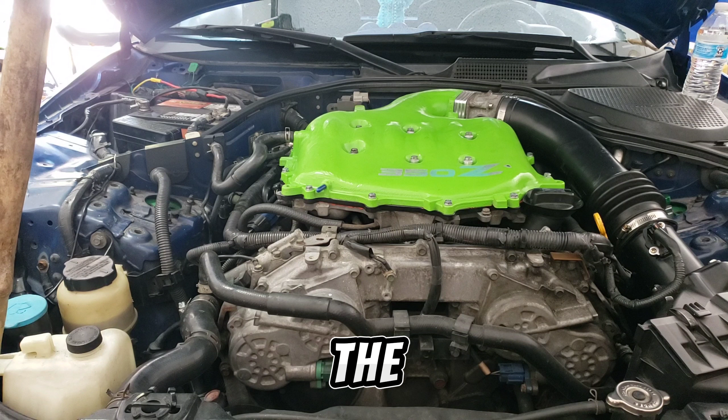You've seen the title, and that's what I'm going after. The principle behind it is the fact that the bottom of the actual fuel injector only has an O-ring separating a large gap of air between. So there could be a potential large leak right there at the bottom of the fuel injector, while the top fuel injector O-ring is still intact, because that is the side that actually holds the fuel to the fuel rail.

So what I'm thinking is the bottom O-rings on the fuel injectors have went kablooey. So hopefully that's it. I think I showed you before in another video. I got a set of the O-rings here, a whopping $7 from the auto parts store. Luckily these O-rings come with a 2-year warranty or something like that.

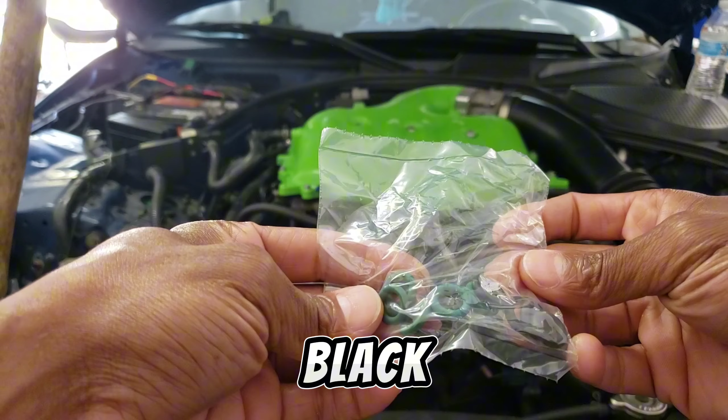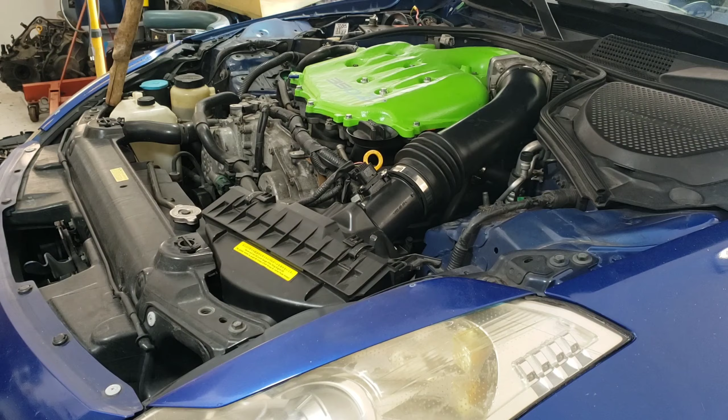Okay, here we are with green and black O-rings. So I'm hoping that one of these has gone kaput, and that's what my problem is. So hopefully after this rebuild, it'll actually stop doing this P2A00 code, and that'll be it. But won't know until we get there.

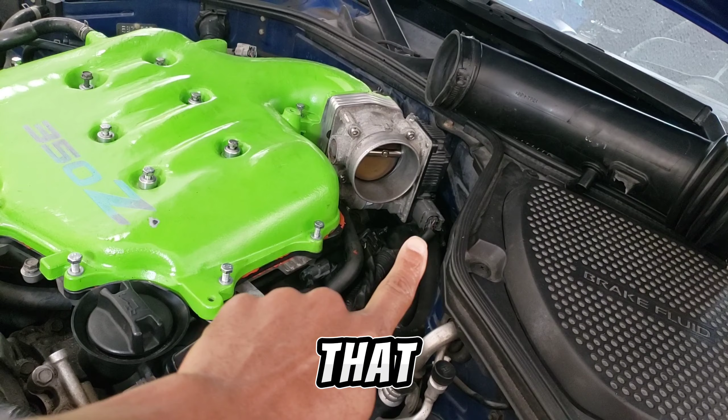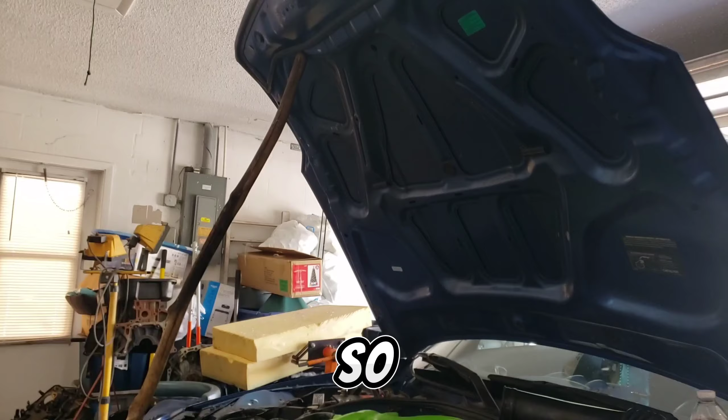Just want to show you that I am going to disconnect that throttle position while the battery, if you can see that down in there, is still connected, and I am going to go ahead and disconnect that and not have any worries about whether it's relearned or not. So I just wanted to stop and show you guys.

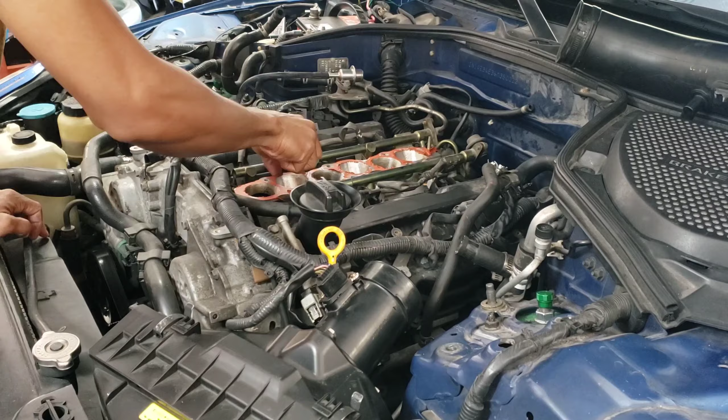So I'm pulling up on that right there, just giving a light prying motion. And if you look at the base of the actual, well, I'm prying up here, okay, just light backwards, nothing to take anything out yet. Okay, so it's got some play, which is expected, because it's an O-ring and rubber moves because it's not concrete.

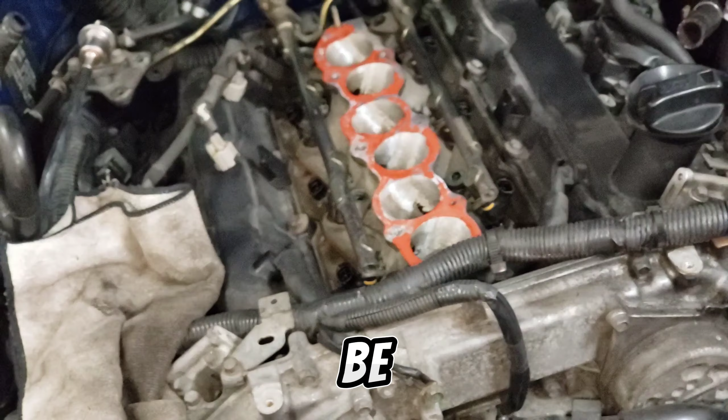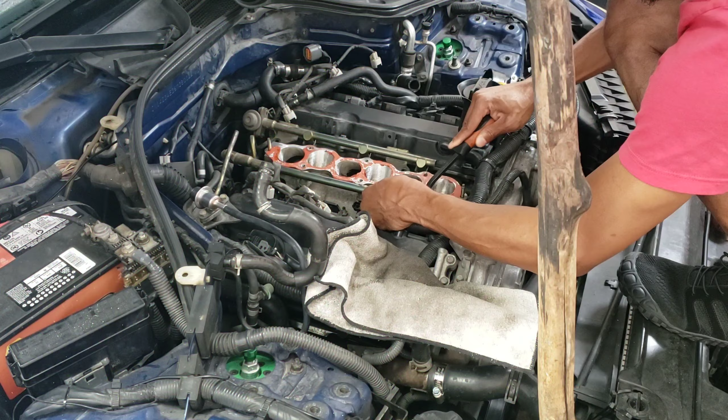But what I did notice, this is still technically bank one, this back one was moving a hell of a lot more up and down compared to the other ones when I'm just lightly prying up before I actually try to unseat that, because you can kind of see how that one's moving right now a little bit. But this back one here, oh man, that was moving a lot. So that might be a good indicator. Regardless, I'm still going after it because I got these O-rings sitting here, so let's keep going at it.

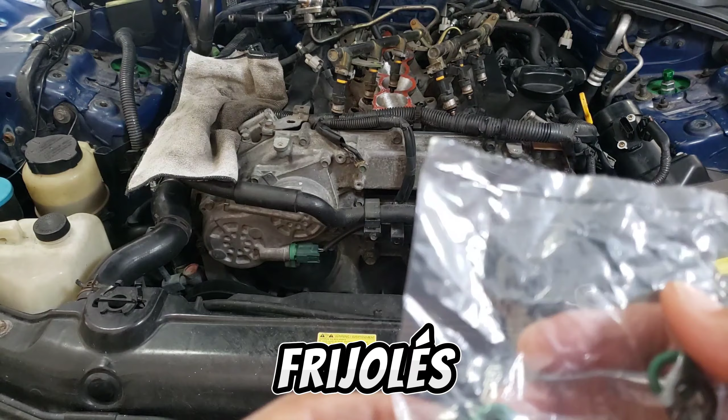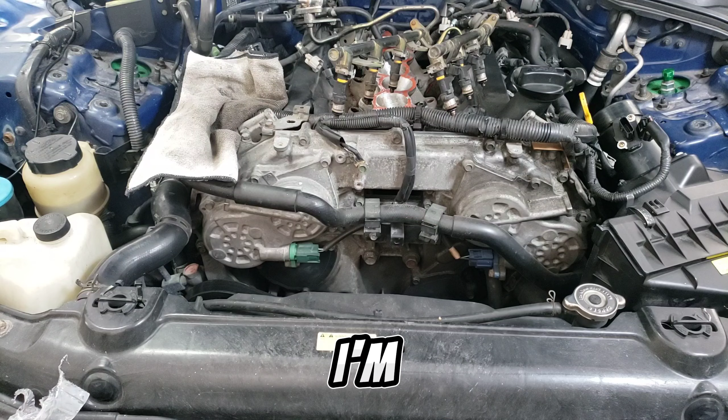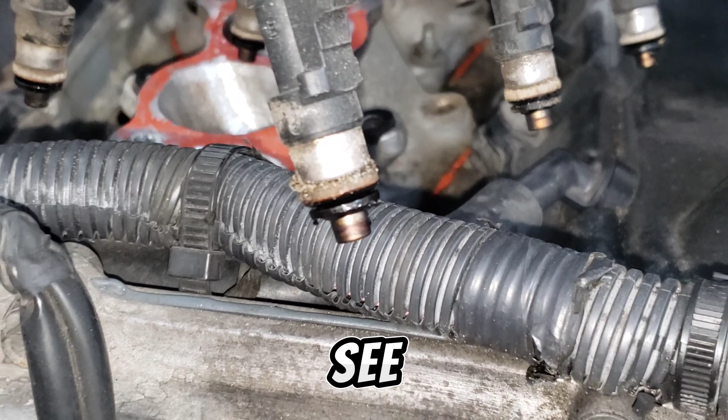Holy frijoles. So for example's sake, these are brand new O-rings. Okay, so example. Serious right now? Get out of the bag. Okay. Alright, so you have one green and one black. That's what these look like new, okay? What I'm about to show you is the ones that are on my car that has 200,000 on it. Let's turn the light on and shine some light on this, and you see what I see.

Cruddy, very cruddy. Look at that one. What is that? That's supposed to be the O-ring. What is that? I might have to turn the white balance down just to show you, because it's so freaking ashy and nasty looking that there's a possibility that could be the whole freaking issue. But never know, because it's a wonderful time here, replacing all kinds of shit for one code.

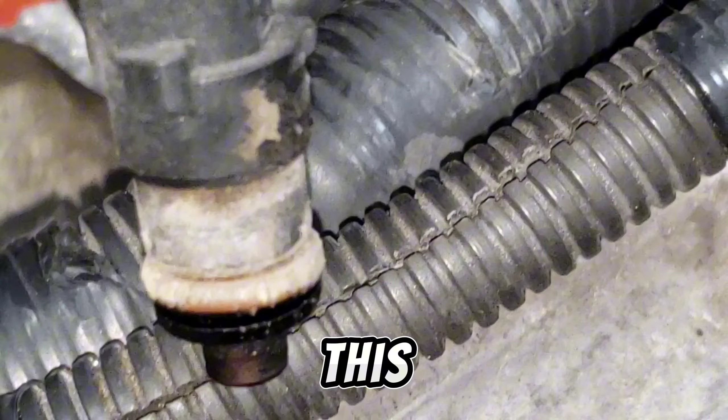Here we go. That is a clear picture of that. That is horrible. Next up, would you look at that? Just take a look at that. And where's this last one at? Yeah. So you get it. These are horrible. This honestly could be the issue.

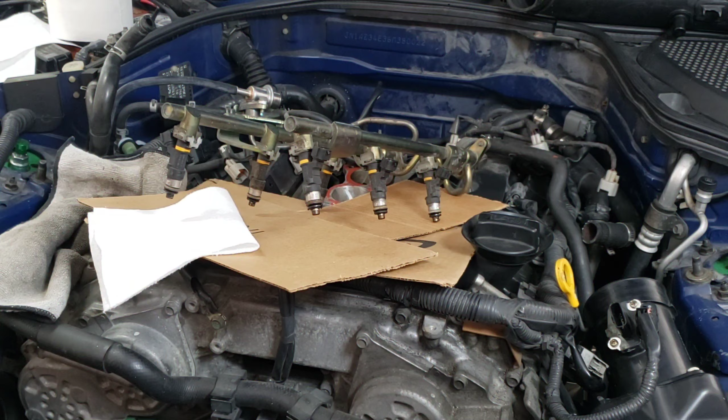When I started taking everything apart, the bolts were pretty much telling me that nobody was in there ever before. So I'm gonna start picking those apart and replacing both top and bottom sides. I don't necessarily have to do the top side because the top side is towards the fuel and I don't technically have a fuel leak, but looking at the age of the bottom ones, I really don't want to set fire to the project here, because that's a big old nope.

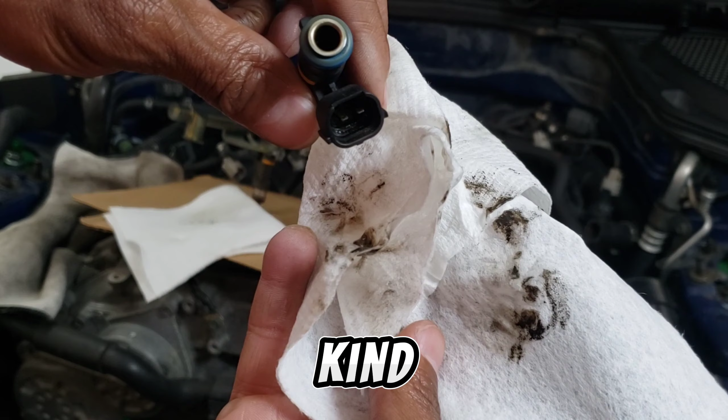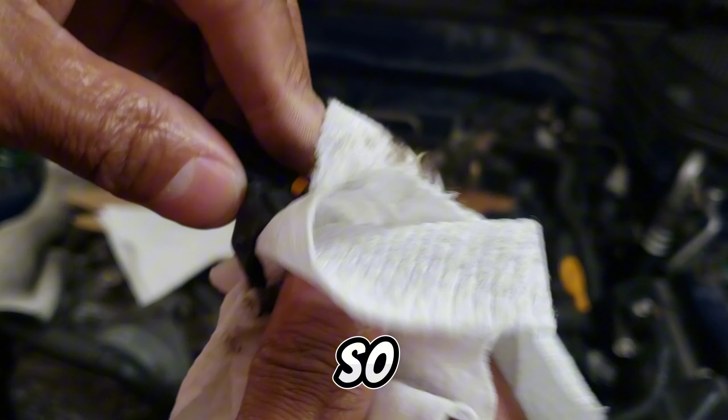This is all the crud that's coming off of this though. I don't see anything down the barrel. The barrel looks clear. It just looks really rotten down below on the O-ring. And the top one don't look too good either, but I mean it looked better than the bottom one did. So moving on.

So I just wanted to cover that to make sure that it didn't spew out anywhere. I'm not exactly wearing safety goggles right now. Regardless, I used a little bit of the gas that came out of it to help clean it. I'm gonna put these on the bench after and actually go through a small bottle of the cleaner just to help everything out. But yeah, rinse and repeat, and I'm gonna get going on these other ones, and I'll let you get a look at the comparison on O-rings.

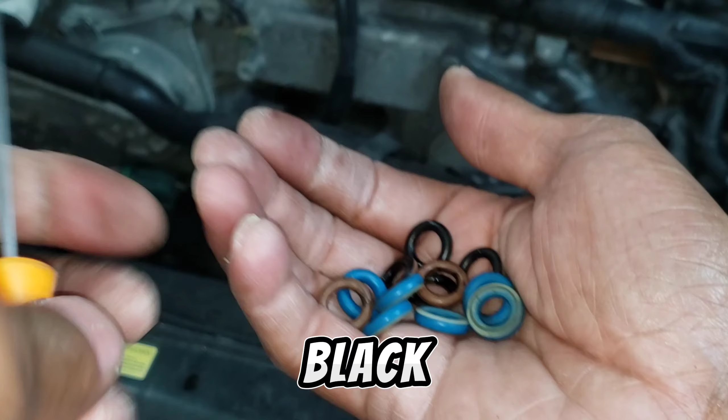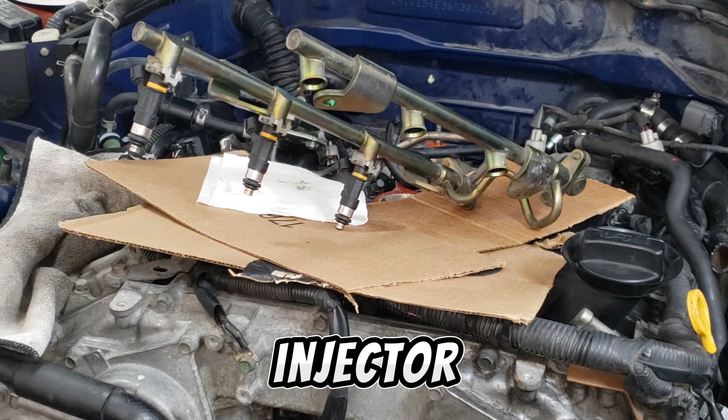Alright, so these are the O-rings that are all off of the old injectors. I guess these are the factory OEM ones. I'm not sure, but they still have some flexibility, but they were definitely way harder and a different size than the ones I just put on there. I did put black on bottom, but just with the simple Harbor Freight hook, I was able to take these off of here. The ones around the bottom are a little bit harder to take off, just FYI.

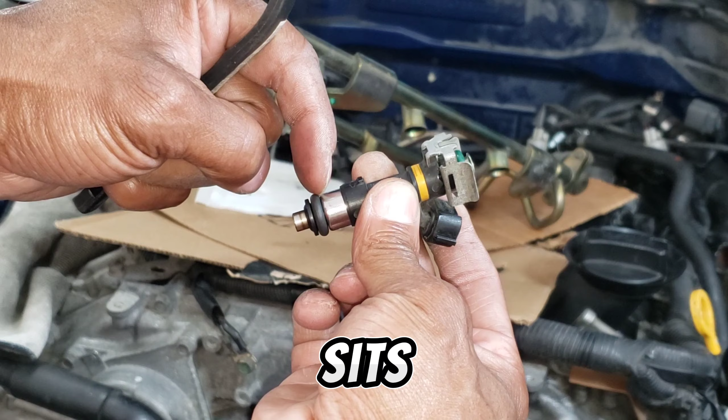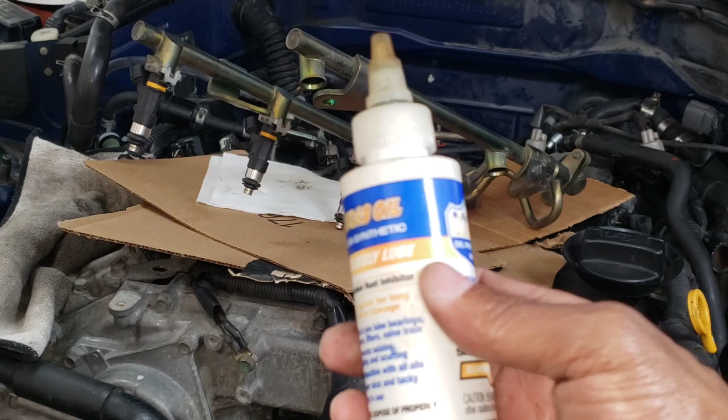And also, just FYI, if you do the injector O-rings, clean this area in between here. I brushed it with one of these kind of toothbrushes here, and I pretty much cleaned in between there where the O-ring sits, and then I wiped it off with a towel, which gives me this nice kind of finish that you see right now. Then I put just a little bit of engine assembly lube, the Lucas Oil engine assembly lube. There we go, semi-synthetic.

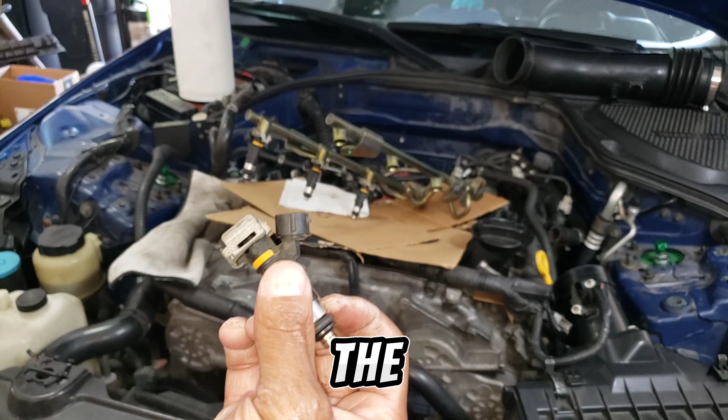This right here is great for O-rings and other things without deteriorating anything. So I put just a little bit on there, which is why that O-ring looks glossy. I didn't do it on the bottom side yet because I still want to clean the manifold. Make sure that nothing slides in that way when I put this back together. But just a tip, when you're putting these back together, get your O-rings back on there and then put your clip in first. So let me set you up here.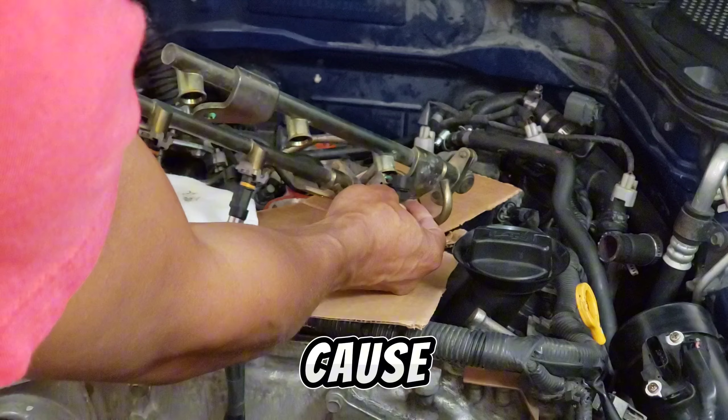This is so simple. Once you have this all set up and put together, it's just as simple as, because the injector connector goes towards the outside, all I'm doing is just a little nice pressing together, and it just clicked in there. Give it a little twist, a little bounce around just to make sure everything seats, and there it is. I can really feel it seat now. It doesn't want to twist or anything. Just that easy. Put that clip on there first and then just smush that upward nicely.

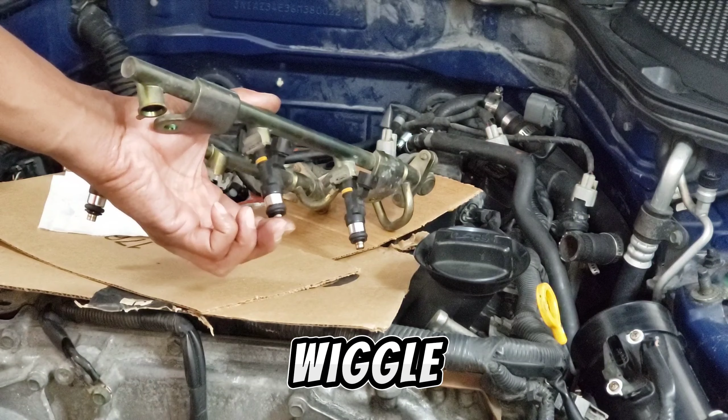Keep in mind that you're dealing with a piece of rubber that's keeping all your fuel in, okay? So be really nice about it when you put this in here. But regardless, a little snap twist, a little wiggle, nothing too crazy, not trying to break the plastic fuel injector. Easy as pie. Nice and easy. Everything's just clipping in just right. All right, and there you have it.

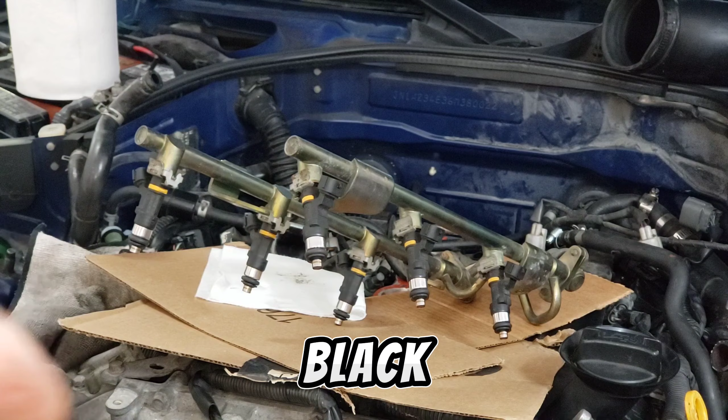So I'm gonna clean the bottom of the manifold where all the black O-rings on the bottom of the injectors go. I'm gonna clean those orifices, and then I'm gonna go ahead and put this all back together. And it's highly plausible that it's the O-ring, being 200,000 plus miles. It's not the average thing that goes bad.

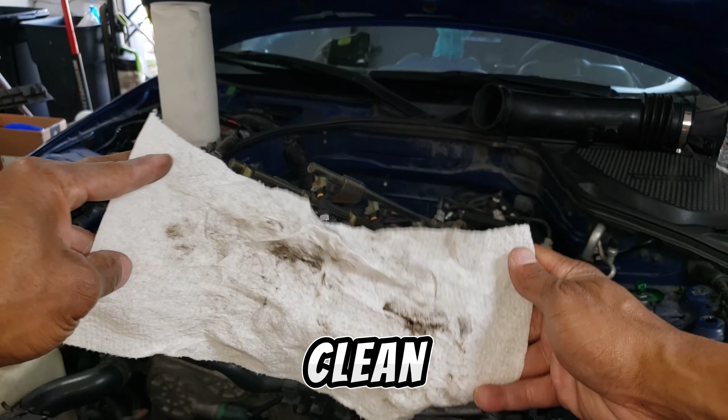This is the towel that I used to clean the injectors. That ain't clean, so yeah, definitely. And this isn't even the only one. I used 6 other ones just to clean and get those out of there. So there's a lot of crud in there.

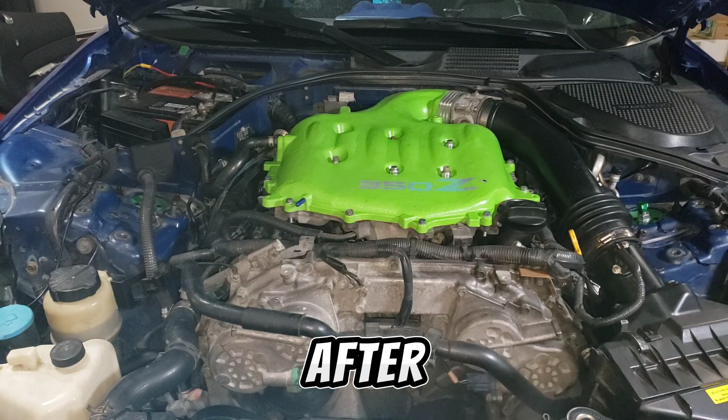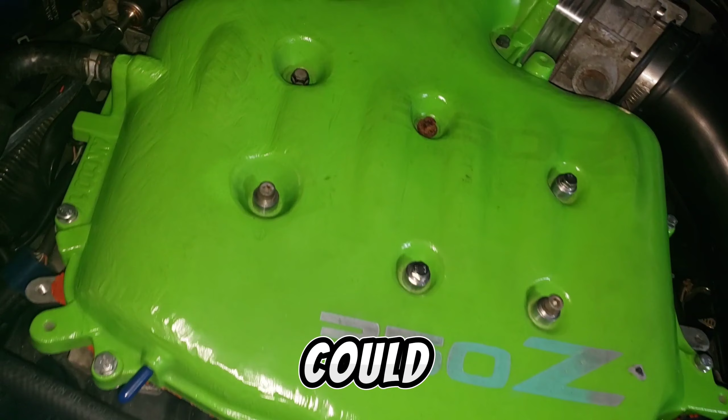So there's a good chance that this actually might solve that lovely P2A00 code. So hopefully this is it. So I should have been rolling for rebuilding this, because when I was rebuilding this, I heard two of the most devastating noises I could hear right now, which was these two bolts I over-torqued, which made like a good old ping kind of noise, and it was not good.

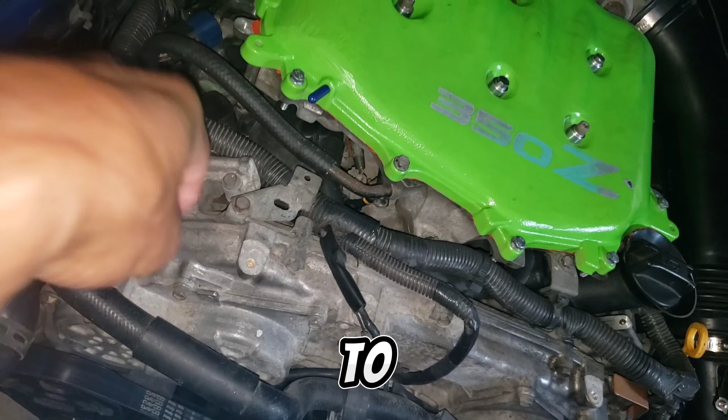So I took it all apart again, re-tapped the threads on that and that one and that one there. Those two that I was showing you, and I tried to get longer bolts. It didn't really help. It was the threads inside the lower one here that's waiting for the nice guy to come down and screw into it. So I re-tapped that, got some different bolts. It's working out for now.

When I threw it back together, I heard a vacuum noise, and it's not this vacuum. It was actually a true vacuum noise coming from there. The actual spacer, I don't know if it warped or if it was just originally not plotted right when it was made. It was leaking right in this area here. That was leaking right there. Unfortunately, I had to delete my intake spacer.

So after I took that apart and deleted that and got rid of that vacuum noise and did those two bolts, got those to fit in together, and put it all back together, after a short while, the code did come back again. So fuel injectors, they were an issue, don't get me wrong, and I'm going to show you in a second on the graph what the difference is, because while driving it did seem so much better. It really was a lot better.

In fact, third gear chirped like it used to before this problem started. With the recent fix with all the injector O-rings, it actually did chirp this time. So before the code was set, it was giving me quite a bit of power that I was happy to have, even without the spacer in there. I still have the throttle body spacer up there. Oh, there we go. I still have that spacer there, but the intake one is deleted.

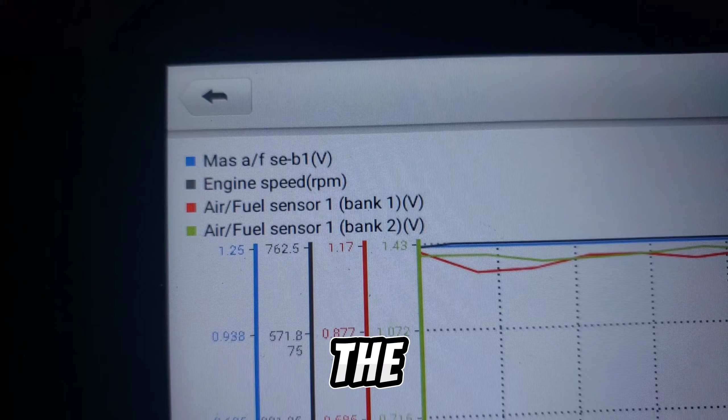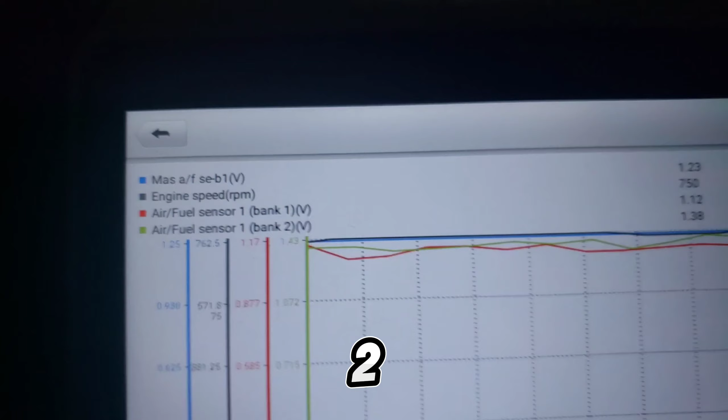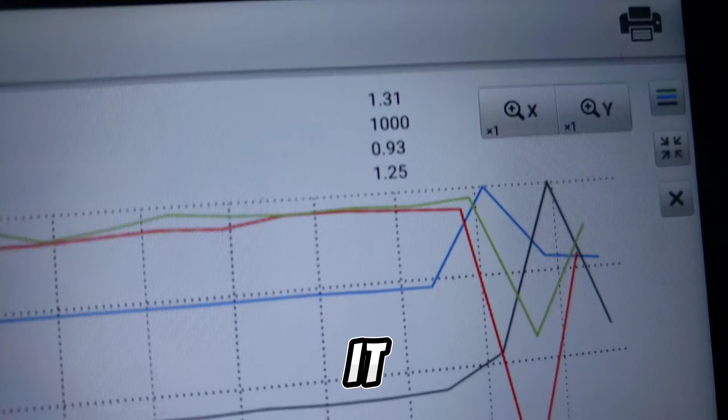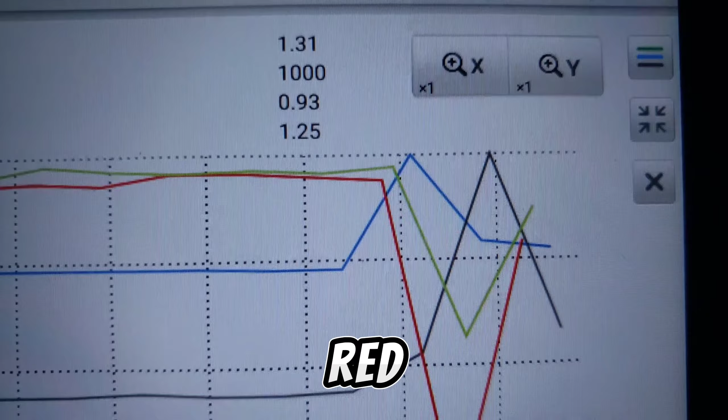So after the repair, on the graph, the mass airflow is represented by blue. Engine speed is a weird gray. Well, we'll go with that. Bank 1 is red, and light green is bank 2. As soon as I got this thing started, it registered everything as really rich. So what happened after I did the fuel injector O-rings? Well, as you see on the first blip here, it didn't raise very much. There is barely an upward motion with the light green and the red, so that'd be the air fuel O2 sensors.

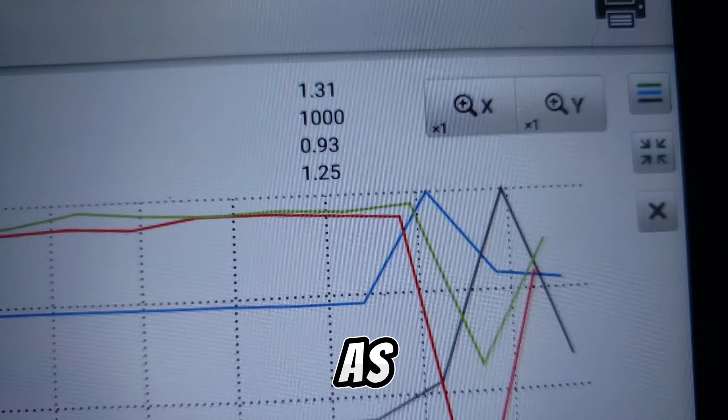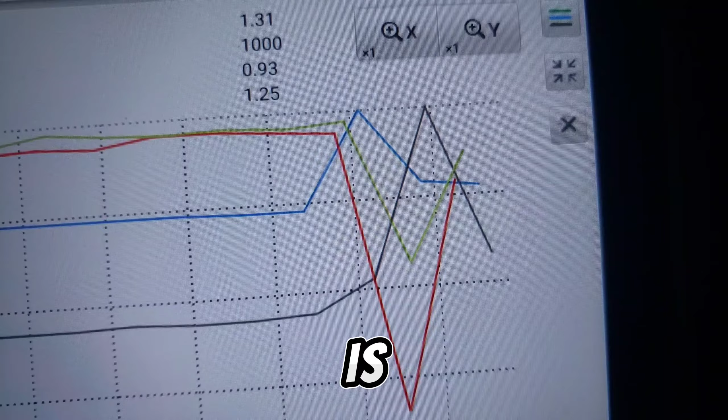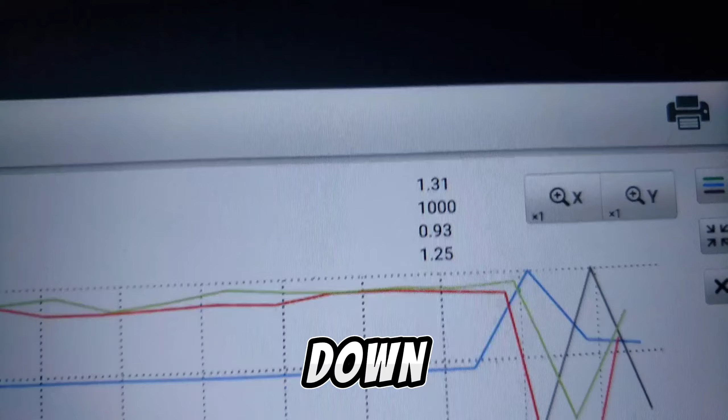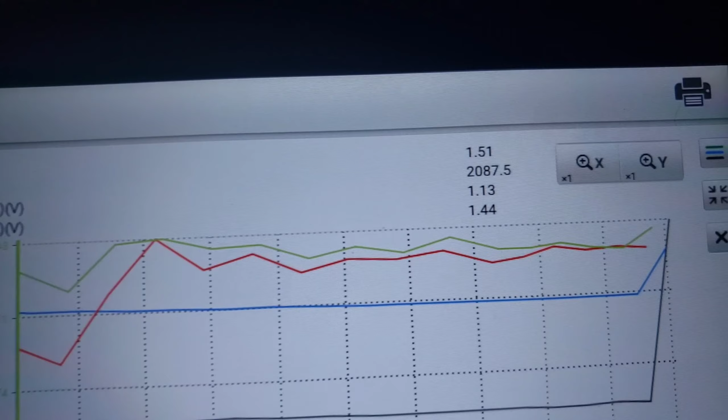There's a lot of air coming through on the light blue, and as that blue is coming up, the O2 sensors are just barely going up and then spiking down as the engine RPM is raising up. So that area right there is doing a lot better instead of spiking up and then coming down. And we'll get to the next one so you can see 1.13, 1.44 going up to 2000 RPM. We have 1.5 volts on the mass airflow, nice little blip.

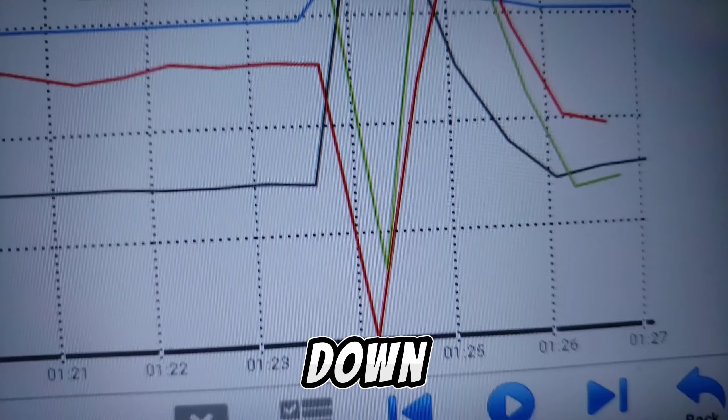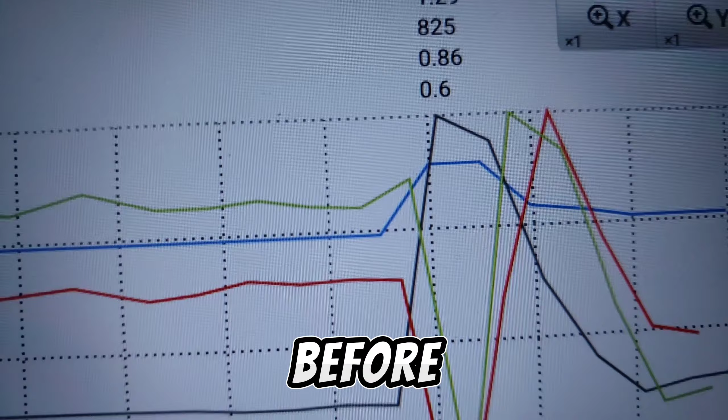But you see there's just a small blip there, which I think might still be the issue, because like I said, the code came back after driving, for fuck's sake. And it's doing its usual, trying to figure everything out. Looking at that, the red went way down. It didn't even come up. It went way down, and then did its usual thing. The green, however, did spike up just a little bit before it registered the mass airflow sensor voltage, so maybe that's an issue, maybe not, don't know. It's a decent amount though.

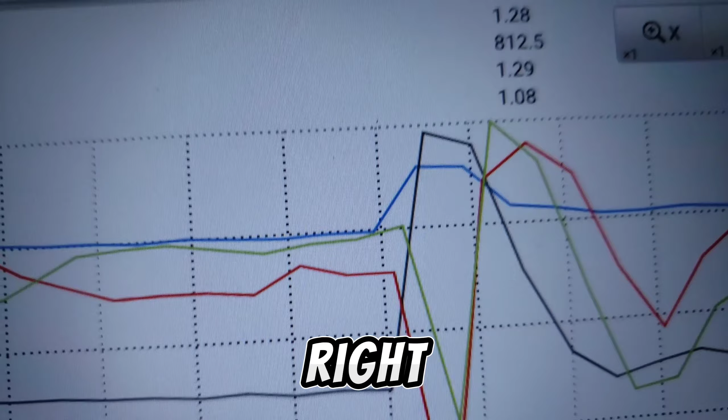Less of a blip. These are definitely less of a blip coming in right there, right there, for the green and the red. Of course, I'm going to still stay on this and everything, but I wanted to give you guys a look at the graph right after the repair on the same video.

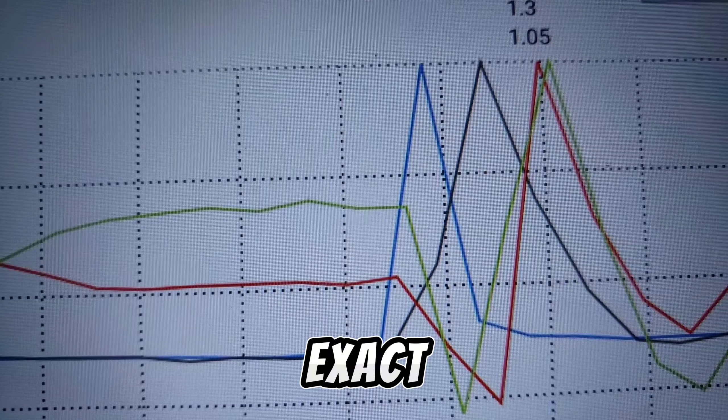So as you can see, this is looking a lot better, a lot more clean as to what we were looking for before, I do believe, because here we are, a nice strong blip of air, and the red line almost barely comes up, and then it shoots down, which is fine, you know. Again, all these cylinders don't fire at the same exact time, so I think that's okay.

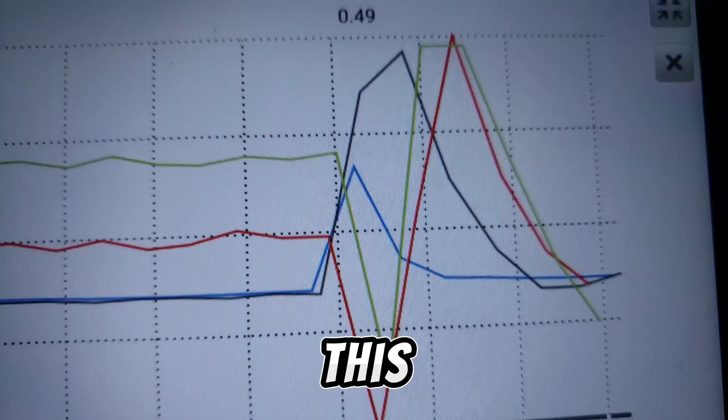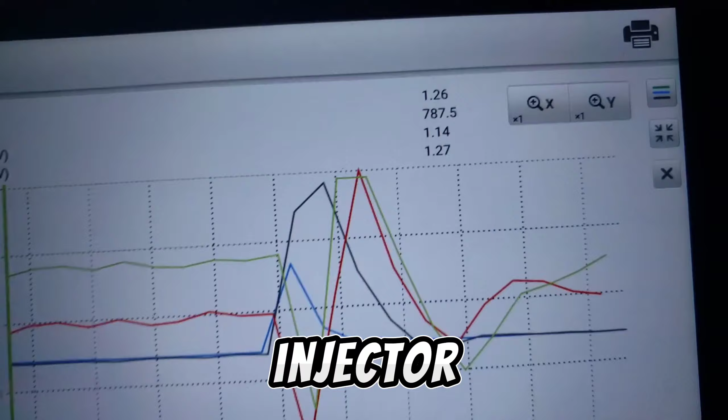But we move on to the next one, and yeah, look at that, 1.27, hella rich. So you can see how this graph is really helpful to what's going on with the vehicle, and every repair makes a difference. So hopefully for you, maybe it's just the fuel injector O-rings.

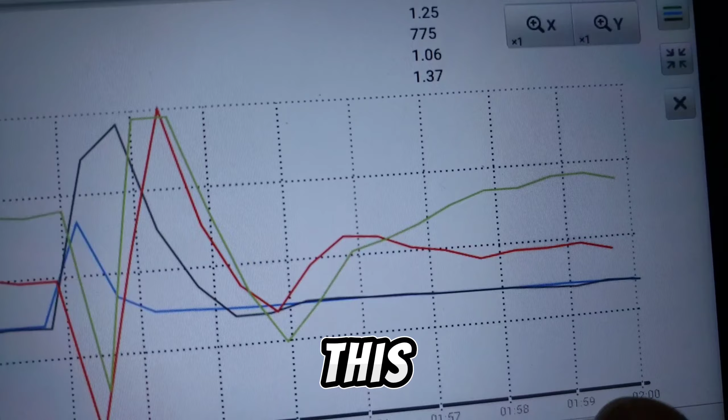Be careful, by the way. I put the colored ones up top and the black ones on the bottom. So keep that in mind. I think I did that right. And I didn't have any fuel leaks. I still don't have any fuel leaks. Knock on technology. So black O-ring set, if they give you 6 black and then 6 colored, the colored go towards the fuel,

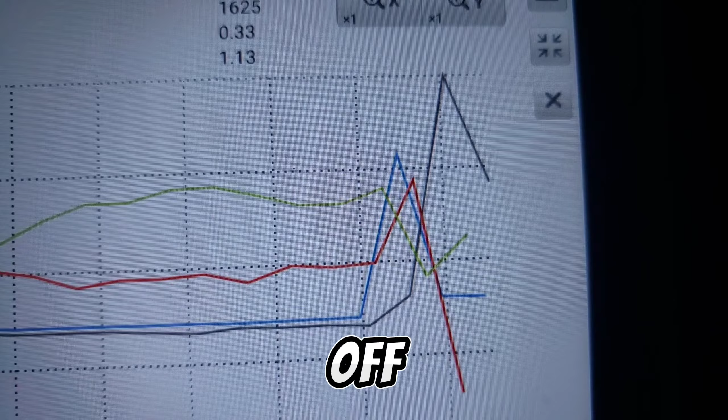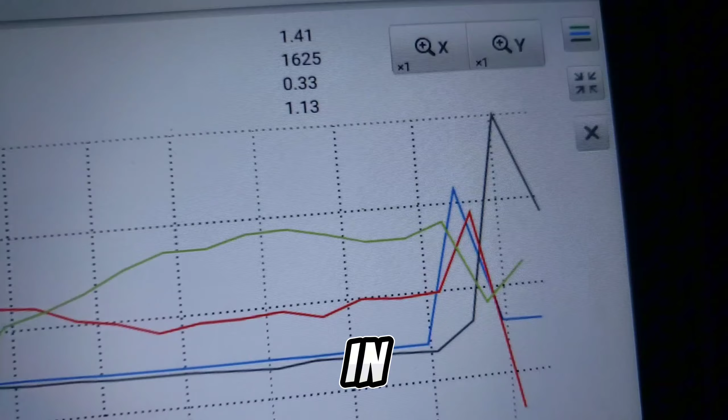I do believe. And even looking at this next spike here, you can see how the red spiked upward before it came down, which might be why it's setting off. But that green went up, not nearly as much, but it did come down. But I think that red one right there might be the issue, how it went hella lean when it was definitely looking for fuel to be in there. And it really wasn't. It was very late, if you can tell what I'm talking about there.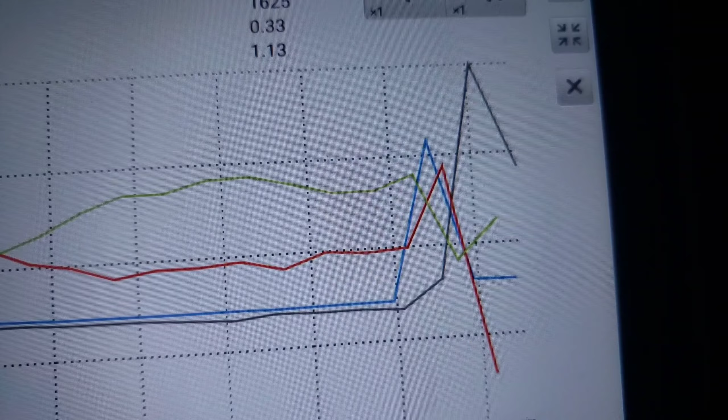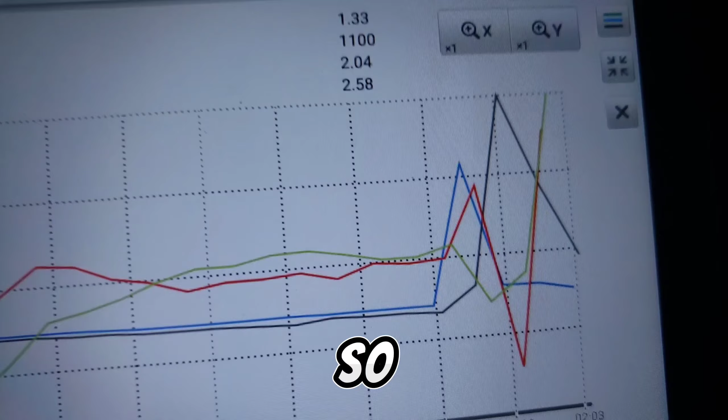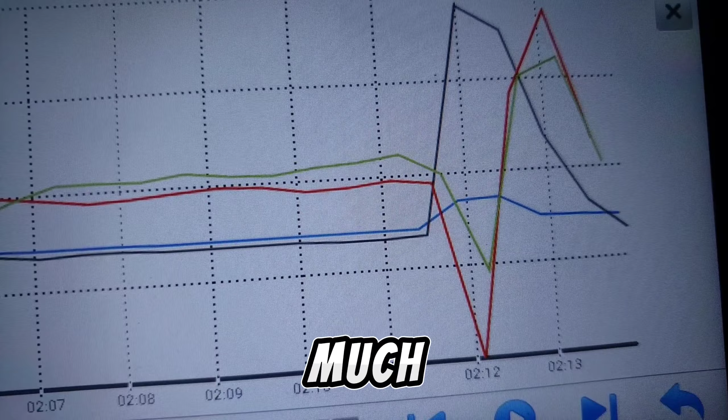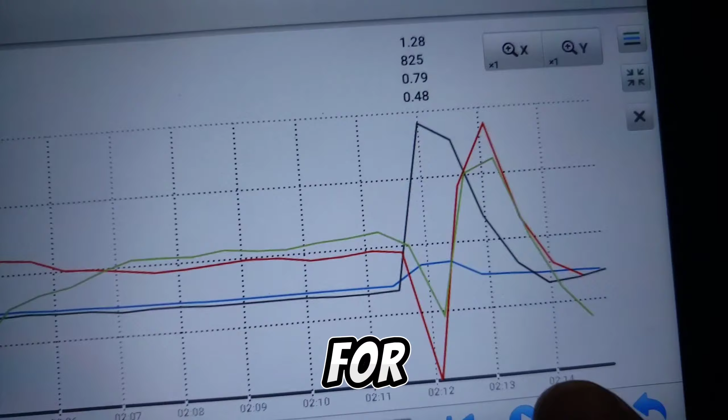Between the engine RPM, the mass airflow sensor, and then looking at the crisscross of the light green and the red, represented by how much fuel is being dumped in there. So I'm pretty sure that's the issue that's going on here. Just a little bit of, yeah, both green and red go down. It seemed like I wasn't asking for very much air, but the RPM definitely shot up and the fuel went downward, which is what we're looking for.

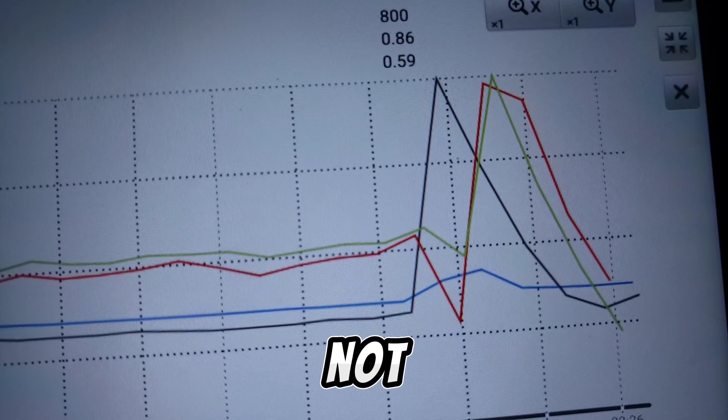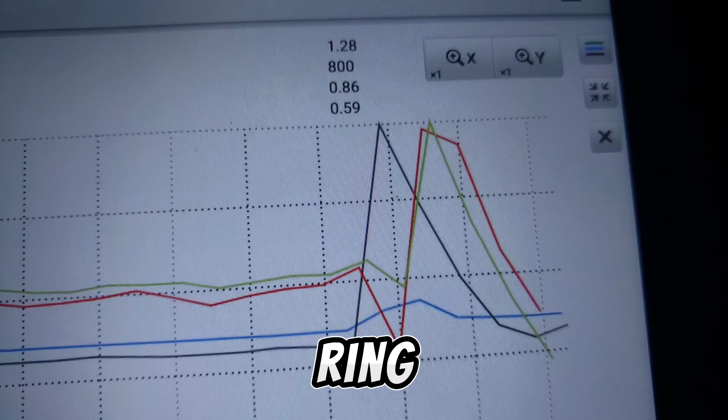So yeah, that's where I'm at with it. That's what the repair did to it. It is working better. It's just not where it's supposed to be at, and obviously with the code coming back, I still have more work to do. I do hope that the fuel injector O-ring might be your problem and you can finally solve this for yourself.

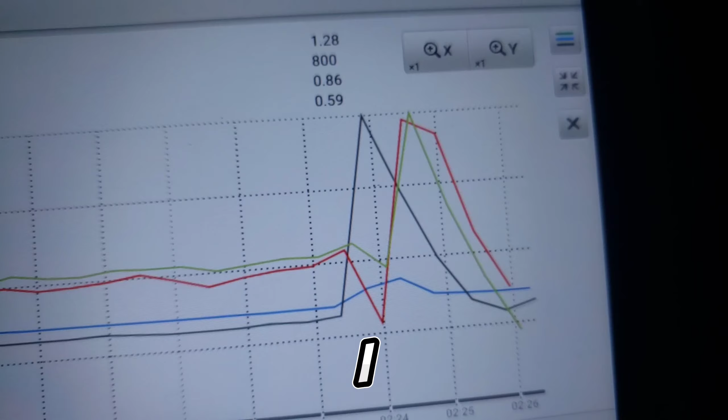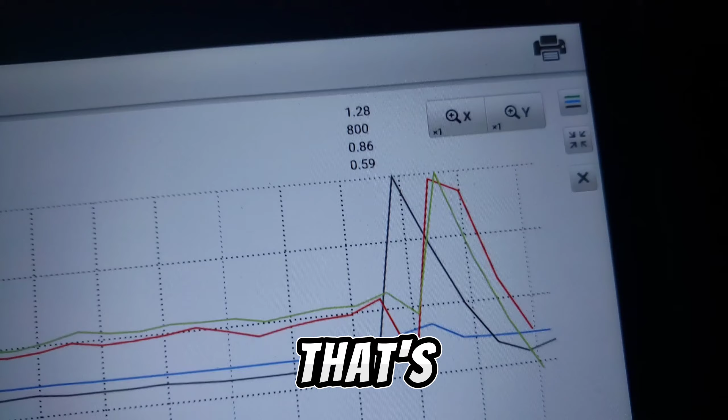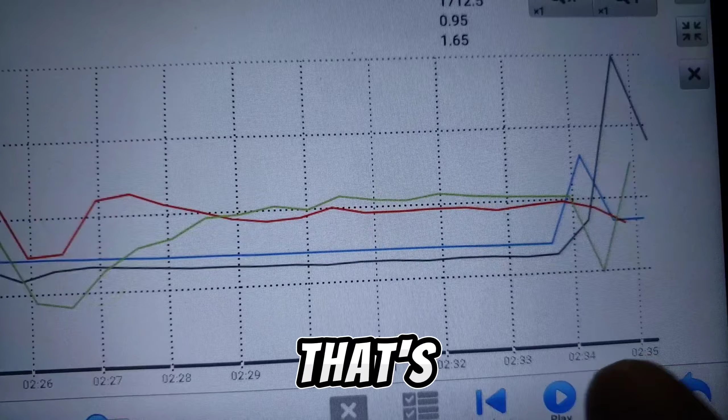Hopefully I can figure this out for myself as well, but for real though, I do hope that it's just a fuel injector O-ring kit, because it's cheap as hell, under $10, and you can walk out with change. Probably grab a pack of Skittles from AutoZone that's probably been there for 3 years or so, but regardless, it's a cheap repair, and hopefully that's your issue.

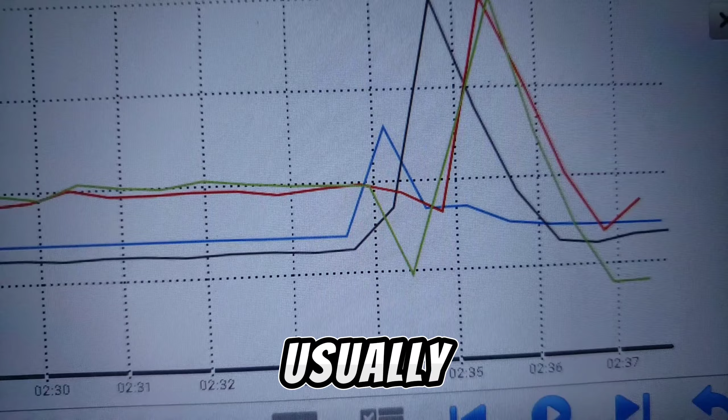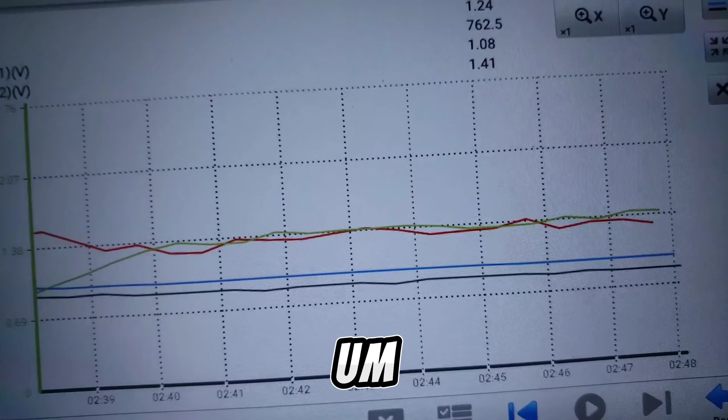You can even see there, that next one, it didn't give all the fuel that it should have, and then it spiked way to the rich side like it usually does afterward, but not a lot of fuel right there. So yeah, just wanted to show you guys that and what was going on.